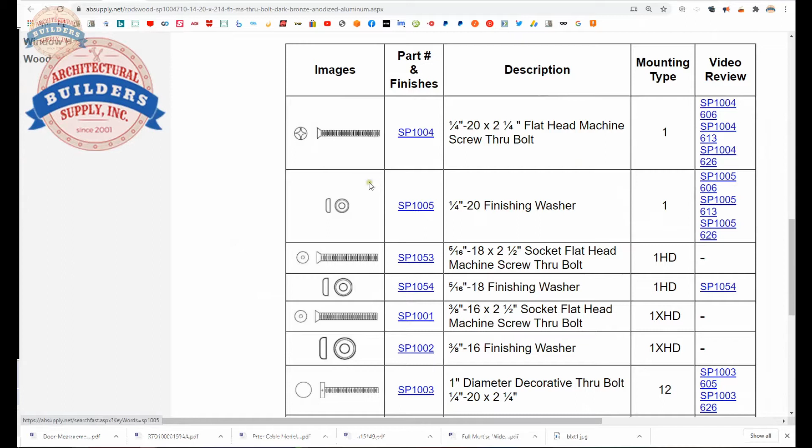We have a table down below showing the immediate sister products to this item, which would be the through bolt and then the SP1005, which is the washer that would inherently go with it. I had mentioned the thicker sizes earlier, your 5/16 and then your 3/8.

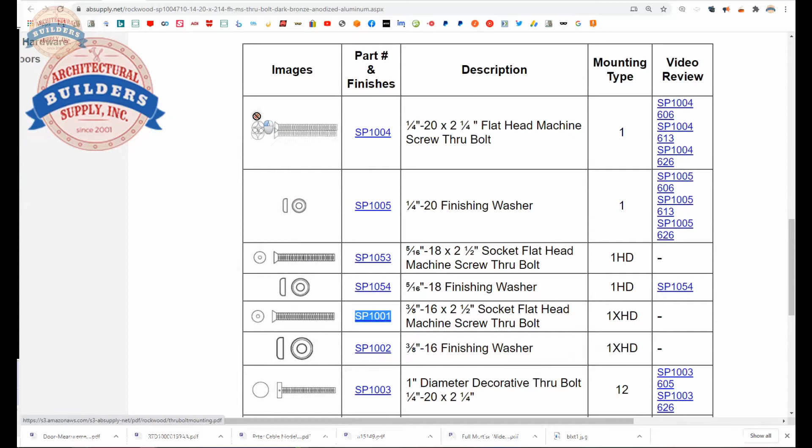There's also available in the 3 sizes a decorative style through bolt, just a blank cap, really all that it is, but might be arguable a bit more aesthetically pleasing than just the head of a flathead machine screw. 3 different thicknesses here as well.

Now there's a link below this video, below the table as well, to the Rockwood mounting kit parts master table, and that will show you all of the constituent components as it relates to bolts when it comes to their pull handles in every sort of variation and derivative style, whether it be for back-to-back or single mount, different sizes, etc. They're all listed here.

It's very common for us to sell many of these bolts, and many of them are kept in stock because they're so common. So this link will allow you to find all of those other part numbers necessary to purchase the proper bolts to replace what you have.

Now, why would you be replacing what you have? Well, I would say you'd be replacing it because of use, abuse, wear and tear. That's just a low-grade bolt, nothing special about it. It's a 1/4 machine bolt, and you put that on the front door of a restaurant, bar, or nightclub with enough use and abuse, it's going to bend, shear, fatigue, and fail. That's why replacement bolts are very common.

My suggestion is that from the very beginning, when you're installing the hardware from scratch, order it with the thickest bolt that you possibly can. Again, it goes to that substantially lower amount of replacement parts that we see when it comes to the thicker bolts.

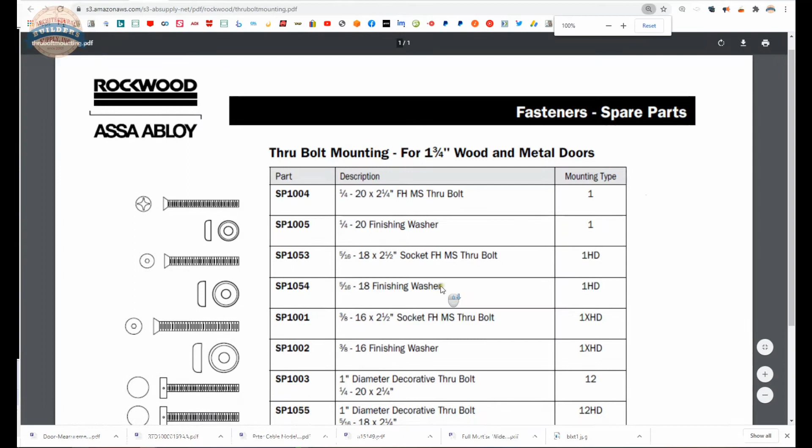There's a link here to the product catalog. That's a handy link, however it's nothing new, no new information here - just an excerpt out of the full line catalog of these bolts and whatnot.

There's a link below this video to the manufacturer's page. When you click on that, you'll be able to pull up all of the Rockwood products that we sell by means of this horizontal navigation, as well as a link to the manufacturer's website and a link to the full product catalog.

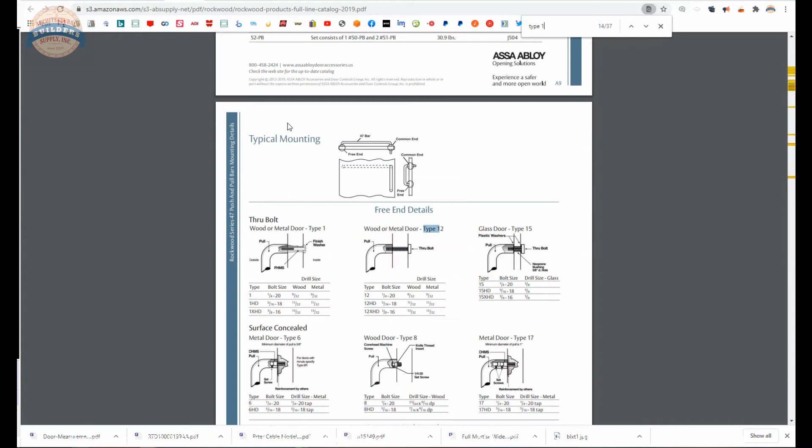The full product catalog will show you the SP1004 and maybe it actually doesn't, but it will show you the Type 1 mount where this is going to be found and used. And if you wanted the 5/16, it would be a Type 1 HD, and then a Type 1 XHD for the 3/8. And here it is.

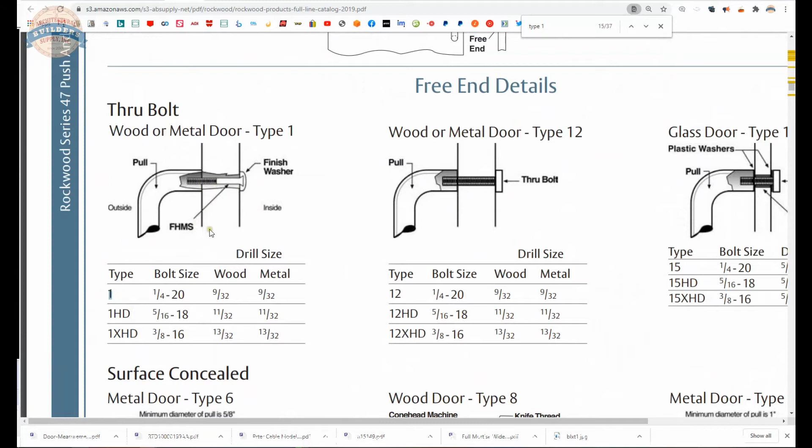That's your bolt, okay, it's used right out of a Type 1. And then SP1005 is that finish washer mentioned as well. And then, of course, different finishes are available.

You can obtain the bolt and all of the finishes that would be necessary to complement your material: oil rub bronze equivalent, polished brass, satin brass, polished bronze, satin bronze, oil rub bronze, polished chrome, satin chrome, aluminum, polished stainless, brushed stainless, dark bronze - which is the one we're dealing with, 710 finish.

711 is black. A stainless steel polished with a 316 base material, same thing in a satin finish, and then same thing in just a 304 stainless.

Let's wrap up this video on camera. In conclusion, this is a very typical and common item for us to sell from Rockwood.

Back to that manufacturer's page, there's also a link to their architectural door pull catalog, and the title of that catalog, I think, is literally Architectural Door Pulls. Let's take a look, and as I'm waiting for that page to load, these are sold as each.

When you buy one, we'll ship you one. Obviously, you're going to need possibly multiples of two or even three, depending on how many mounting points you have.